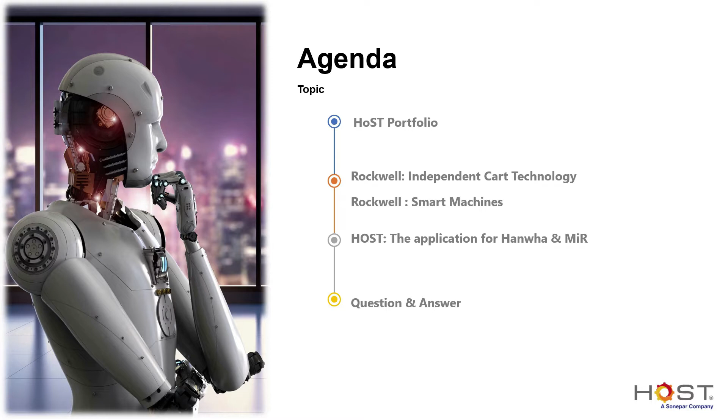Now, before we begin, please allow me to introduce Host and our suite of solutions. 3 decades of experience in industrial automation has made Host, part of Sonepar Group, the trusted and leading partner of companies looking for holistic solutions to their industrial needs.

Businesses like yours no longer need to rely on expensive and cumbersome manual processes. With our cutting-edge solutions on carbon footprint reduction, energy management, production and operation, smart manufacturing, robotics, network, cybersecurity, we deliver customer-centric value to address evolving business needs. Get work done quickly. Contact us today.

Established since 1979, Host have transformed into a solution provider, focusing on innovative and sustainable automation solutions to the market. In 2014, we joined Sonepar Group.

Sonepar has been the industrial automation and electrical product distributors for over 50 years, with 48,000 associates worldwide and 145 operating companies in 48 countries. In 2019, our group sales achieved a total of 24 billion euros.

With the ever-evolving needs from the manufacturing environment, new rules and trends lead to smart and flexible manufacturing. With consumer demands like myself and you, more information on nutritious value, health, ethnic, allergy warning has been clearly labeled on the packaging. Therefore, it leads to customization and in turn creates multivariant packaging of the same product, which creates more packaging SKU. And manufacturers are struggling to keep up with the changes as the number of increased SKU is projected at 10 to 50%.

With the shrinking labor workforce for manufacturing, time to fill out a trained and skilled technician takes roughly about 70 to 120 days. With this general trend, let's see what challenges exist in the manufacturing environment.

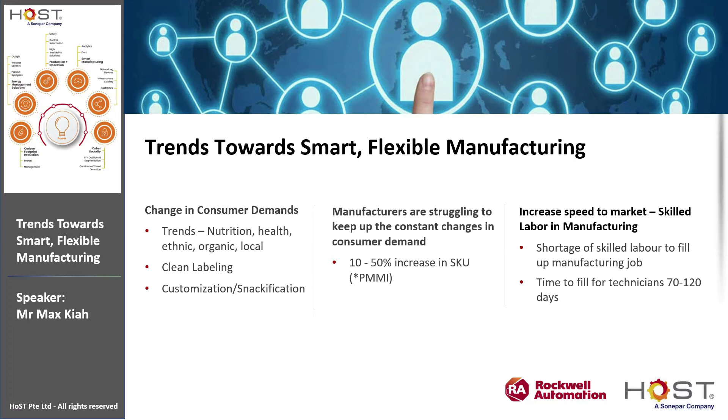Now let's look at the trends, challenges and concerns from the end user viewpoint. Under operation, we have high product mix causing numerous setup changes, causing lost production time, high maintenance costs on belt and chain systems when running at full speed as the maintenance intervals get shorter, inventory pressure as you need to keep numerous mechanical parts to keep the belt and chain system running, high energy costs, and plant floor space constraints.

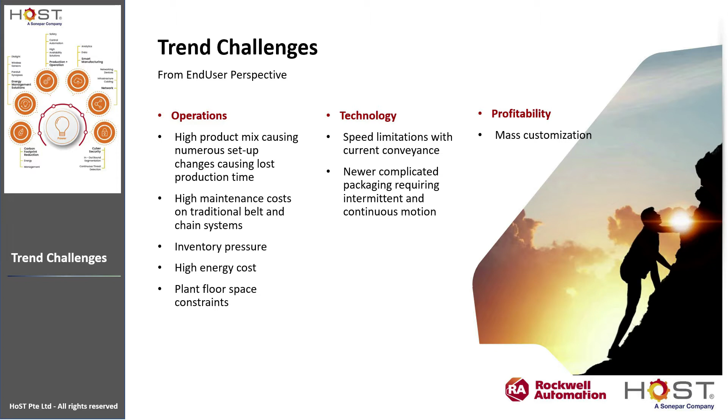We look at the technology segment: speed limitation with the current conveying system, and newer complicated packaging requiring different motion profiles or assembly techniques to achieve the final packaging. Last but not least, we look at the profitability of the plant. With mass customization, it means dipping into your bottom line. Machine design and manufacturing flexibility.

Let's look at higher production rate, simpler mechanics and pitchless control. Machines that have to run multiple sizes such as 4, 12 and 16-inch carton must be sized for the largest carton, making smaller carton run less efficient.

ICT gives freedom of pitch, allowing for optimized design to maximize speed regardless of size. We eliminate chain, belt, gearbox and other mechanics that can limit speed.

Faster changeover. With the number of changeovers continuing to increase, fast and consistent changeover can have an even greater effect on overall production that a machine can achieve.

Reduction in in-feed complexity. Traditional machines require product to be oriented, spaced, and timed precisely to function properly. This drives in-feed complexity. ICT provides flexibility that allows for simpler in-feed, with spacing and timing inherently handled by the ICT technology.

The individual tools on the mover can stay the same for various SKUs. Any changes for pitch or spacing are done electronically and require no physical change.

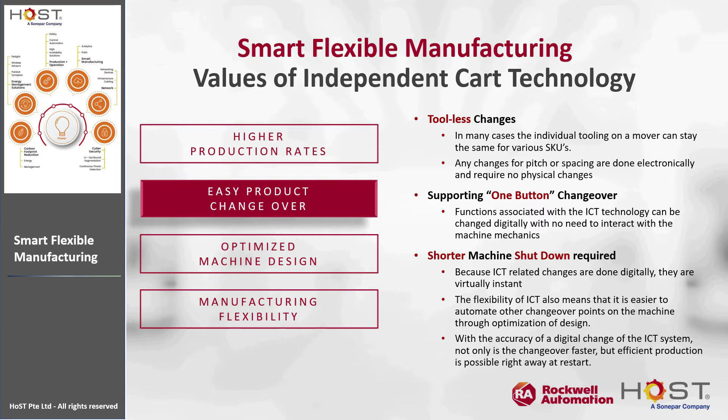Product is precisely spaced coming into the machine, no smart belt or complicated transfer needed. This improves operational efficiency and reliability, with a mix of continuous and intermittent motion. The process carried out within the machine can be optimized, utilizing whatever motion is most efficient for the production sequence. Reduce floor space and manpower.

Functions performed by multiple machines can now be integrated into a single platform, which makes integration of the turnkey solution easier.

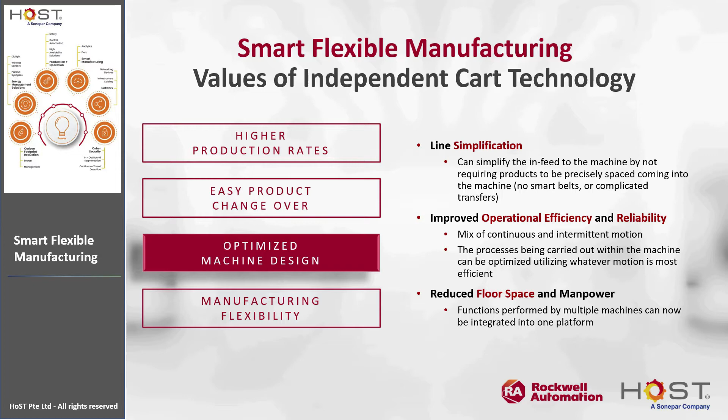Manufacturing flexibility. Format change on the fly can optimize performance based on the package being run. Simple tooling change and programming can allow for reconfiguration to a new packaging or function. High scalability allows easy redeployment for new products because it's not limited to what the machine was originally designed for. This enables possible capital savings by reusing or redeploying the equipment across a broader array of applications.

We also have a modular machine approach, which with the use of robots and their flexibility, makes it easier to design the rest of the function of the machine to be modular and changeable. The end user can utilize much of the existing asset versus a whole new capital investment.

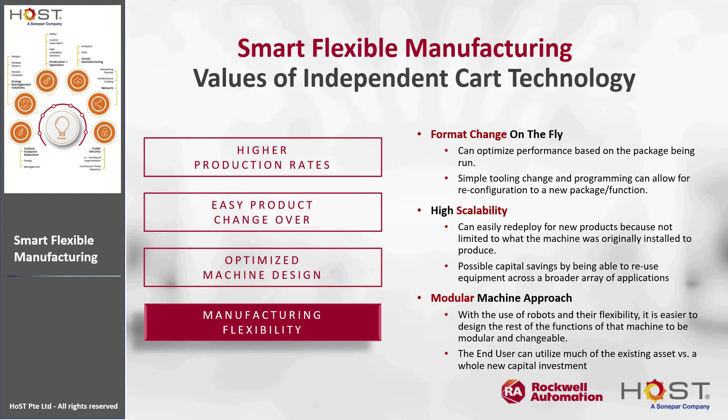Historically, motion control has incorporated chain, belt, gear, and other mechanics, and this indirect solution has limited flexibility, wasted energy, and excessive maintenance costs. So with ICT, we can achieve higher throughput with fewer mechanical components and linkage.

We can achieve a higher acceleration of 10G and also a speed of up to 5 meters per second, combined with fully controlled motion profile for higher throughput.

Unlimited flexibility. Each moving cart is controlled independently, allowing for flexible mechanical pitch, enabling the same machine to handle multiple package format sizes at once while fully controlling product motion.

Constant package tracking. Integrated track and trace software controls the cart with precise knowledge of the cart's position, eliminating the need for external sensing and complex tracking solutions.

Increased uptime. Elimination of mechanical linkage and components allows a minimum number of moving parts, reducing overall downtime, maintenance, and energy consumption. Smaller footprint: technology allows combining all product formats in one machine type within a smaller footprint.

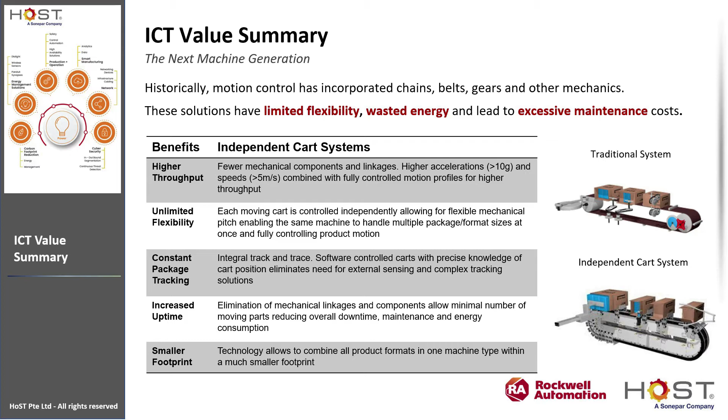Let's look at the independent cart technology portfolio. We have the MagneMover LITE, which is an intelligent conveying system for payloads lighter than 10 kg. It's easy to design and set up, flexible, modular, and scalable, with simple programming, and can control up to 1,000 carts within a large system.

Next we have the QuickStick and QuickStick HT. They are intelligent propulsion and control systems that can have payloads from 10 to thousands of kg. It's flexible, modular and scalable, and like the MagneMover LITE, it can have up to thousands of vehicles in a large system.

So for iTRAK, it's an intelligent positioning system. It's a closed-loop performance LMS, and you can synchronize with other motion axes within the production area. It has high dynamic performance and force.

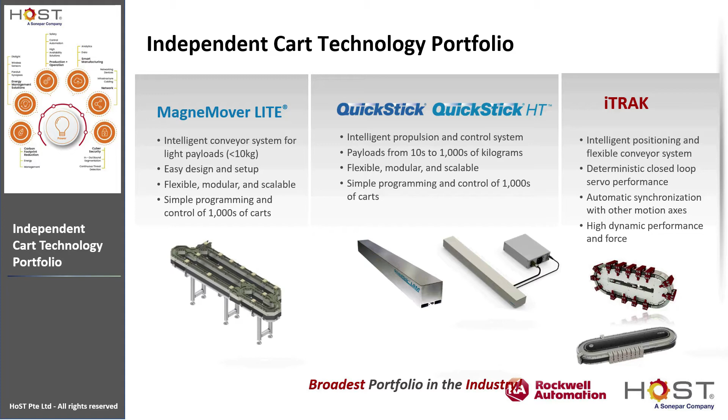MagneMotion is more favorable with system integrators and end users, with many wins for between-machine transportation and station-to-station transportation for assembly operations. It's able to do multi-lane layouts, and switching is a major differentiator.

Sync motion is gaining popularity for synchronization with external auxiliary equipment outside the system. For iTRAK, it's favored by OEMs.

Machine builders see many wins for high payload and high speed applications, building the core of the machine and requiring completely new machine design. It takes a C-level approach, mechanical and electrical engineering, and is mainly used in packaging, manufacturing, and assembly applications.

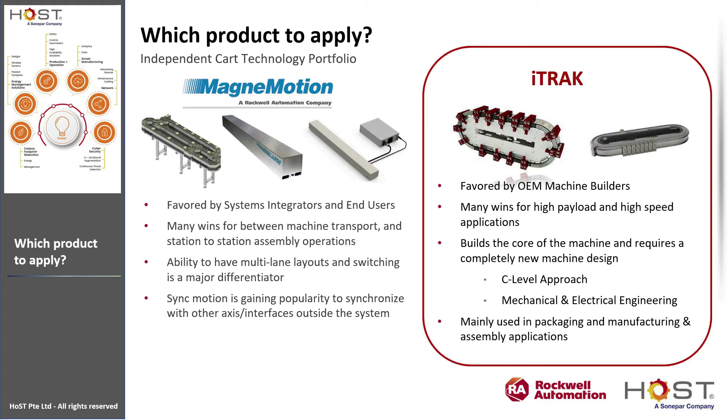All of this product is scalable, modular and flexible. Importantly, these are controlled with what we call fire-and-forget control programming.

You can do a merge, diverge, transversal with complex path systems on a large scale transport design, mainly controlled via AB PLC over Ethernet IP and control over TCP IP, using the same common software platform for the MagneMotion product family.

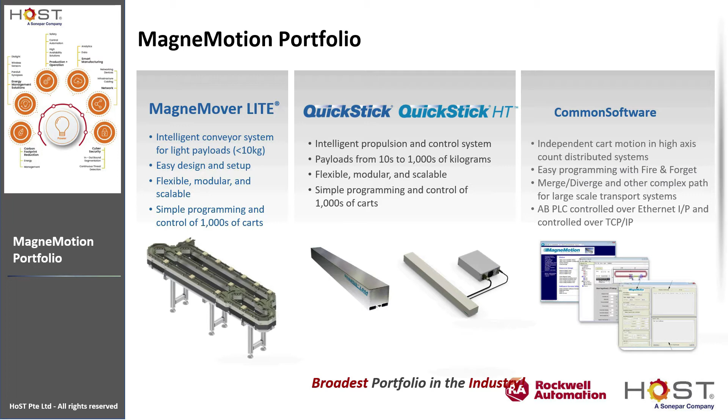We have the iTRAK Medium Frame where you can have a peak force of up to 793 Newton, perfectly fit for higher payload application. We also have what we call the iTRAK ETO, where you can have liquid cooled motor modules, heavier payload movers, and large radius curve.

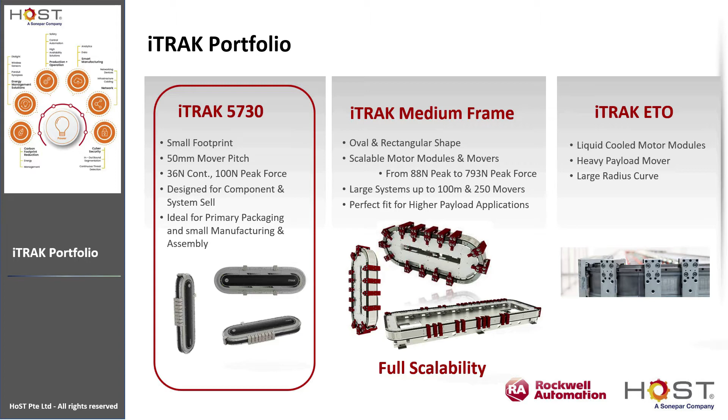Control style. The standard control for MagneMotion is like a taxi service, or what we call fire and forget. We just issue a command to a vehicle to move to any point in the MagneMotion system. The control system will drive the vehicle to the final destination at max velocity and acceleration, generating a motion profile and adjusting it as necessary for the vehicle to arrive at its destination. As mentioned, collision avoidance is a standard feature within the fire and forget control.

We have another type of control, what we call the SYNC IT Control. It's as good as driving a car. That means it complements the control of motion of the vehicle, whether QuickStick, MagneMotion, or iTRAK. You can determine the acceleration, the speed, where it moves, and where the sync zone is - that means where you need to synchronize with external auxiliary equipment. So this is the two types of control available for the ICT family.

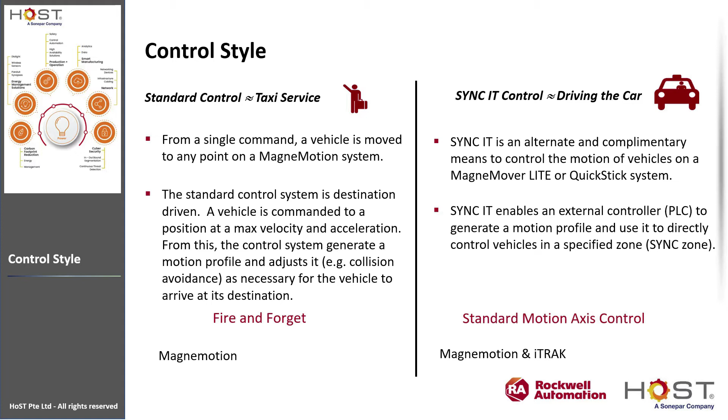Now let's view an application video of horizontal form fill and seal, whereby it utilizes easy changeover using a one-touch button, so everything is changed automatically and very fast.

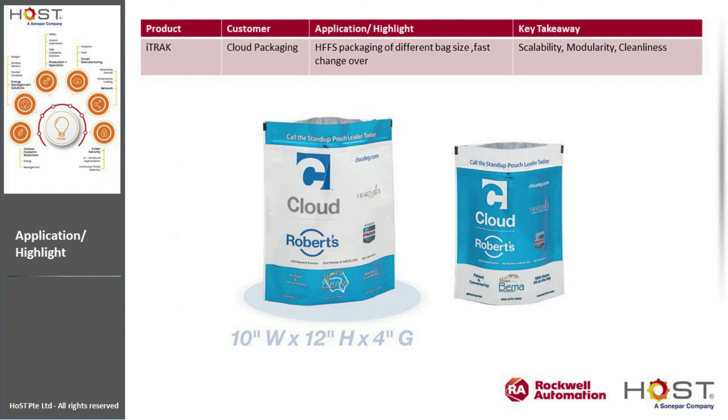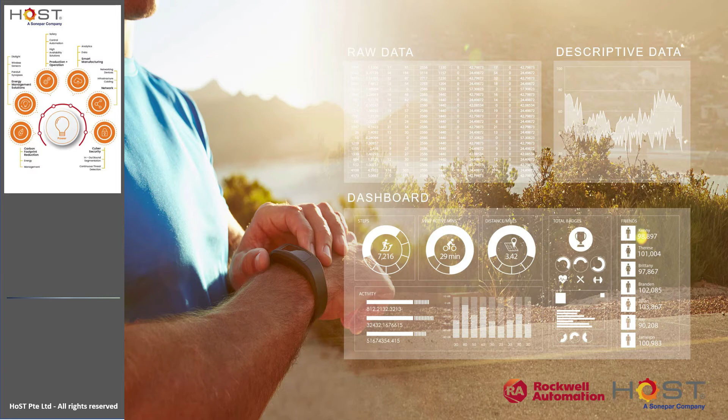So how does this apply to industrial automation? There's an evolution underway of converting components into intelligent connected devices. These devices are being integrated into broader systems that are radically changing the competitive landscape for everyone. It is also creating new workflow tools to allow workers to be more collaborative, agile, and efficient.

Digitalization is about bringing the machine closer to people with things like augmented reality, where we can use mobile devices like our phones or glasses that provide contextual and actionable information in real time - technology that can be used to train operators or augment field technicians as they diagnose, troubleshoot, and repair products in the field.

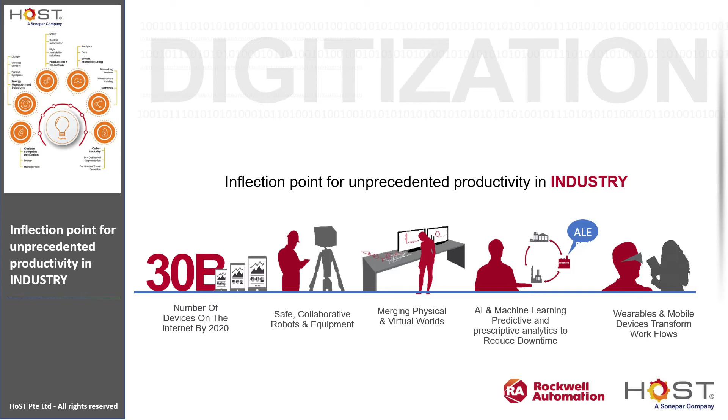Based on some statistics, it is predicted that by 2025, IoT will contribute a cumulative increase to the world economy of between $5 to $11 trillion.

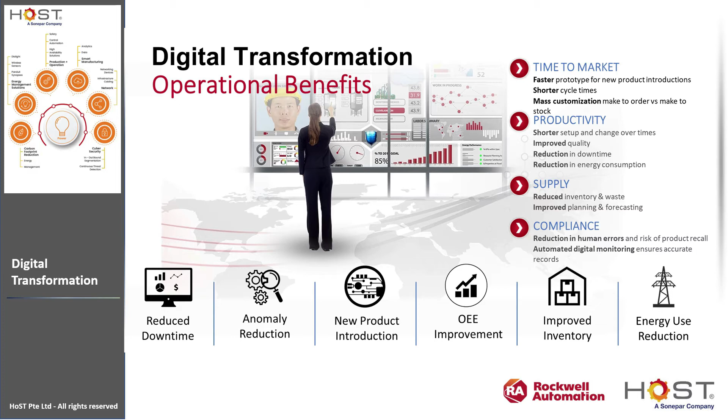So what is a smart machine? It's about turning data into action in real time. This intangible commodity is the key to better understanding of operational performance at the most granular level, so they can improve operations and produce more at higher quality levels in a more efficient manner.

A smart machine also solves challenges created by pressures and trends faced by end users today, such as providing unprecedented access to real-time data that can be turned into actionable information. Data can be logged and analyzed to help workers make better decisions and ultimately optimize not only the equipment, but the manufacturing process itself. These capabilities are creating new opportunities for organizations to achieve faster and more productive processes, produce higher quality products at lower cost, increase productivity, and more optimal supply chains.

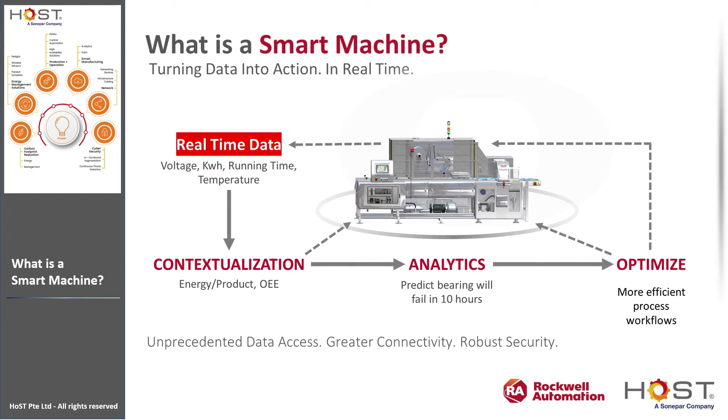So, building a smart machine requires the right mix of technology, process, and people. What are the key business drivers for OEMs to build a smart machine? Firstly, I would say it adds value, it also reduces costs, creates new revenue streams, and reduces risk.

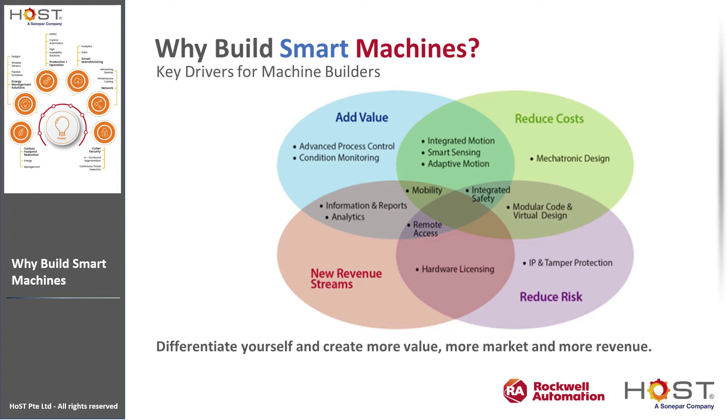Building a smart machine will bring positive impact to your business, so don't wait - start identifying opportunities. Building a smart machine is a journey, so start small while building up a roadmap to reach the ultimate goals.

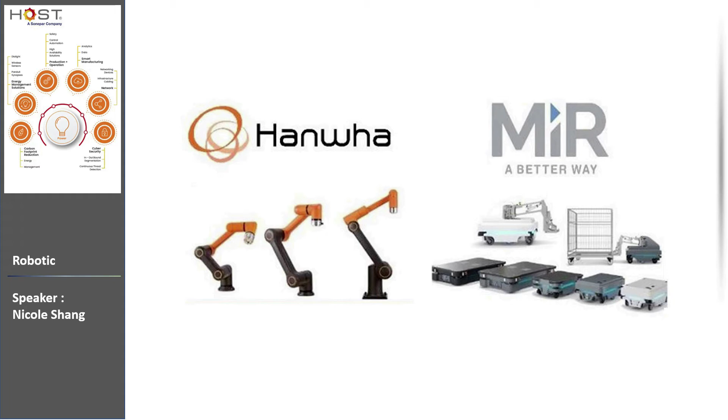Today we will be looking at the following: Hanwha Cobot and MiR, the mobile industrial robot. We will be running a live Q&A at the end of this webinar, so if you have any questions, just pop them in here. Let's start with the mobile industrial robot.

What is the difference between AMR and AGV? A guided vehicle follows fixed routes, usually along wires or magnetics embedded in the ground. An AGV robot is clever enough to use simple sensors to avoid hitting obstacles along the way, but it's not clever enough to go around them. Whereas AMR is much more sophisticated, packed with sensors and powerful onboard computers that help it understand its operation environment.

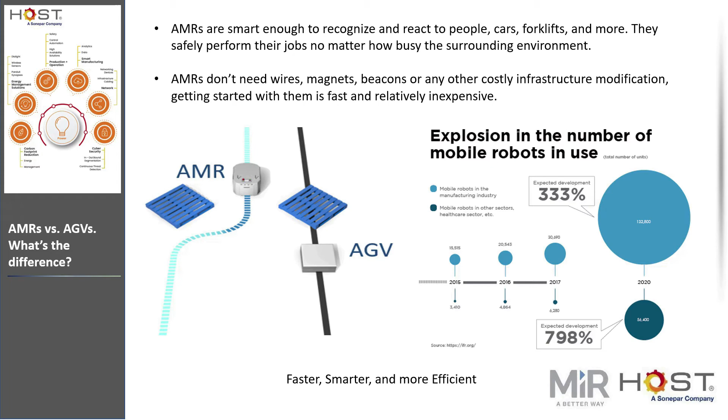There's been an explosion in the number of mobile robots in use in 2020, a growth of 333% in the manufacturing industry and 798% in the healthcare sector. This research result is done by the International Federation of Robotics.

Different industries have different needs, so every industry faces unique challenges, but across all types of sectors, AMR can add value to make your business work more efficiently, smarter, and safer than before.

MiR is an open robot ready for your application to be integrated. With the MiR Go, we present some of the applications that are ready to go, easy plug and play. Here you can see different categories and specific products and solutions made by third parties for customization of the MiR robot to meet customers' needs. You'll also be able to ask for documentation you need to make your application through MiR.

The MiR UI is an extremely user-friendly interface, works on PC, tablets, smartphone, and the dashboard is customizable.

The MiR Fleet also offers centralized control of the robot from a single station throughout your facilities. Thanks to the intuitive web-based interface, it's easy to program and control a robot fleet, including robots with different top modules, hooks, and other accessories.

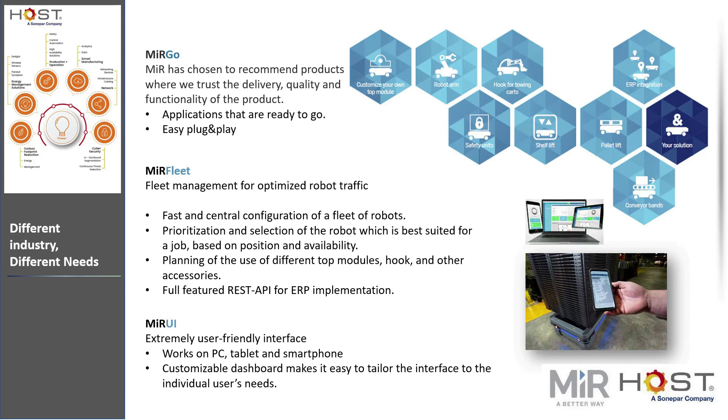Once the programming phase is over, the system manages, prioritizes, and selects the most suitable robots for the operation that needs to be carried out, based on positioning and availability. You'll also be able to receive email notifications keeping you updated about obstacles or other unforeseen events that may prevent the robot from carrying out a task.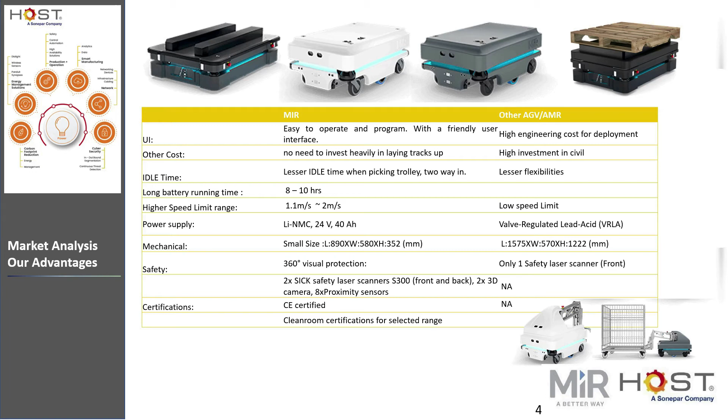So about the sensors, let me bring you to more details. Here are the sensors for safety. There are two types of sensors mainly used for navigation and obstacle avoidance.

The 3D camera shown in figure 1.1 is used for frontal obstacle avoidance, and the camera does not record live video but point clouds. It detects obstacles in front from 5 cm above the floor to 1.8 meters high.

Our laser scanners, each with 270-degree coverage, there are 2 in each corner of the robot, which covers a total of 360 degrees around the robot, 2-meter emergency zone, and 8-meter warning protective field range. The laser scanner is also used for mapping, planning routes, and localization.

Other than that, there are ultrasonic sensors, internal sensors including IMU, motor encoder, and accelerometers.

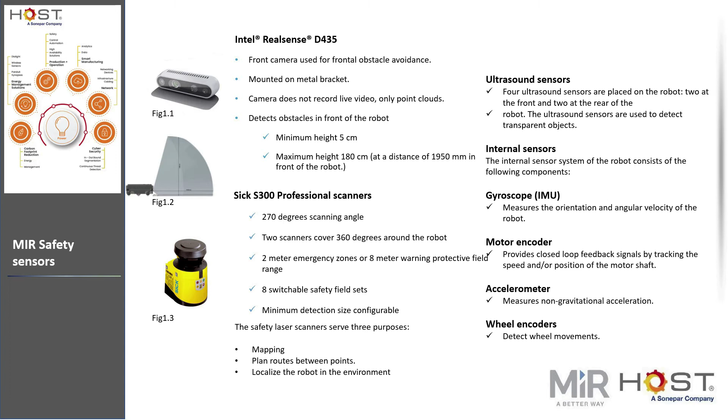This is what the robot will see in a real-life example. Figure 1.1 shows what the human eye sees, a chair in the corner of the room, and Figure 1.2 shows what the robot sees in front using the front camera, a cloud of dots projected above the map.

Figure 1.3 shows what the robot sees with the laser scanners, red dots fitting on top of the black lines of the map.

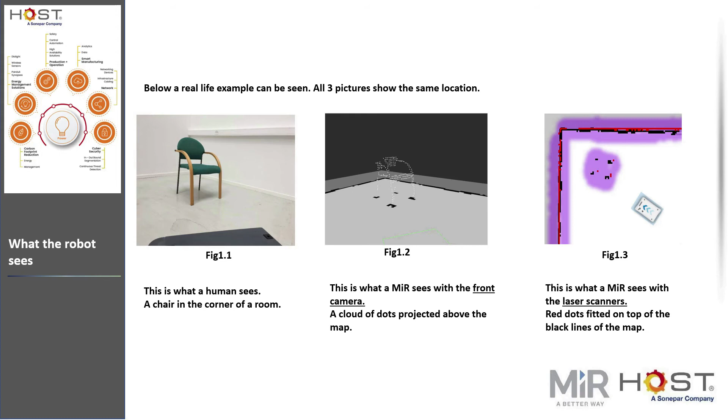Let me show you some case studies for MiR application. Infinitus specializes in R&D and manufacture of Chinese herbal supplements. A total of 3 MiR 200 robots were deployed in the oral liquid production workshop in the Jiangmen plant, allowing users to optimize human resource allocation and maintain a well-balanced workflow in terms of traffic and productivity.

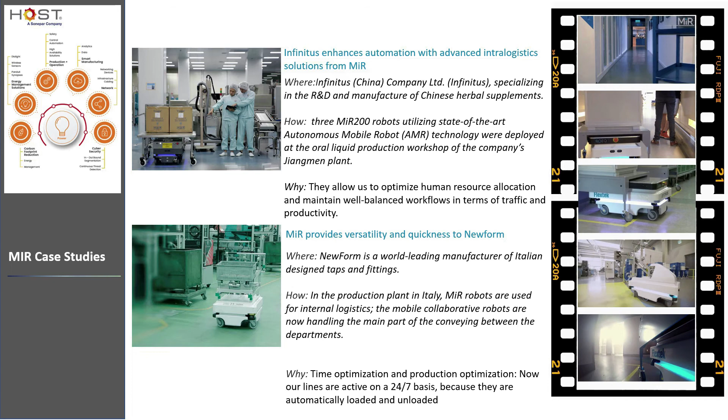And New Form, which is a world-leading manufacturer of Italian design taps and fittings. The MiR robots are used in internal logistics, and cobots are now handling the main parts of the conveying between departments. As a result of time and production optimization, lines are active on a 24/7 basis.

Let me show you a video before we move on to Hanwha cobots. Here you go.

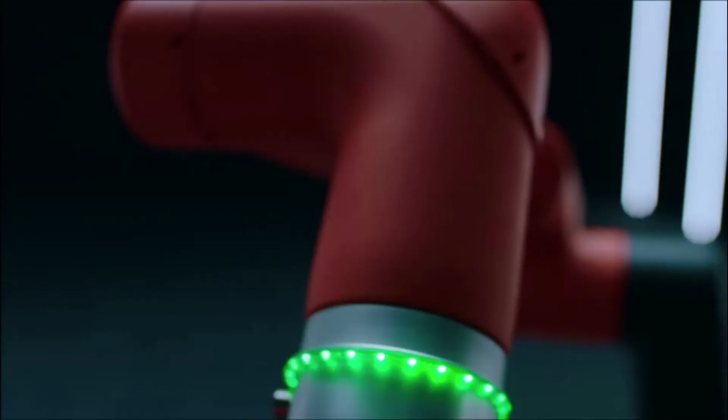What is a collaboration robot? Cobots are robots intended for direct human-robot interaction with a shared space, or where humans and robots are in close proximity. Automation is no longer difficult.

The collaboration robot, Hanwha, is easy to control and flexible in responding to changes in the production layout, efficiently cutting investment costs and operating expenses. It also provides a safe and convenient work environment.

There are a total of 3 types, classified as 3 kg, 5 kg, and 12 kg payload. The HCR3, with 3 kg payload and an infinite rotation on the end joint, has an advantage for screw driving and assembly applications.

The HCR5 has a range of 915 mm, helps employees improve productivity, and is also clean room class ISO 2 certified. For the HCR12, it has a larger working radius, making it easy to pick and place heavier loads.

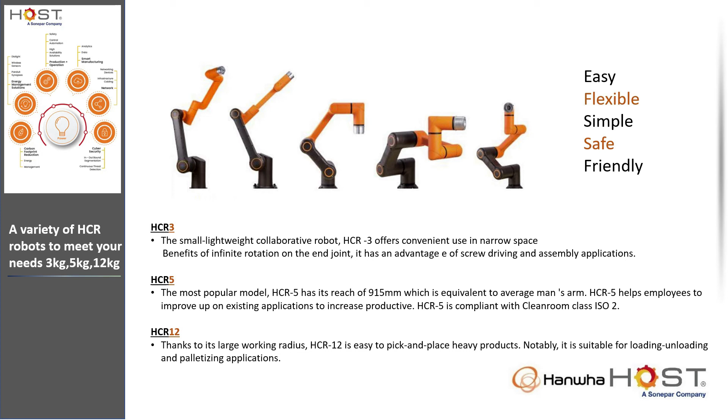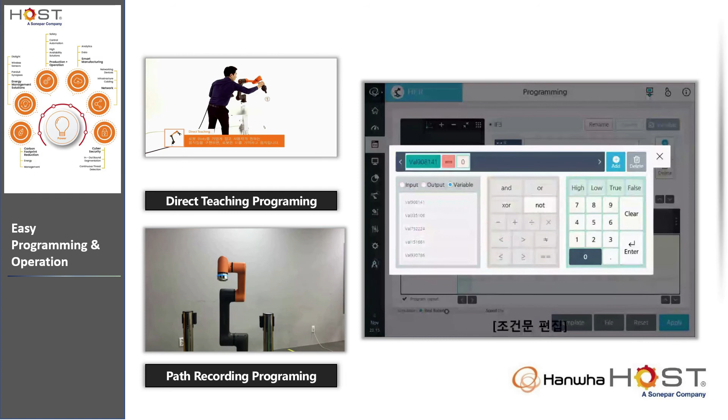Hanwha robot is easy to program and operate. It can be easily programmed using its icon-based graphic user interface, and the timeline-basis programming allows the user to intuitively monitor the workflow.

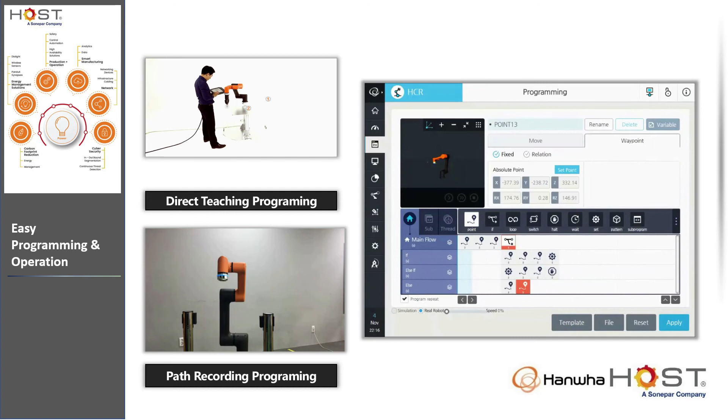In a simpler way, the user is able to grab the robot and direct teach the waypoint, or record the motion path to the robot. You may look at the video here.

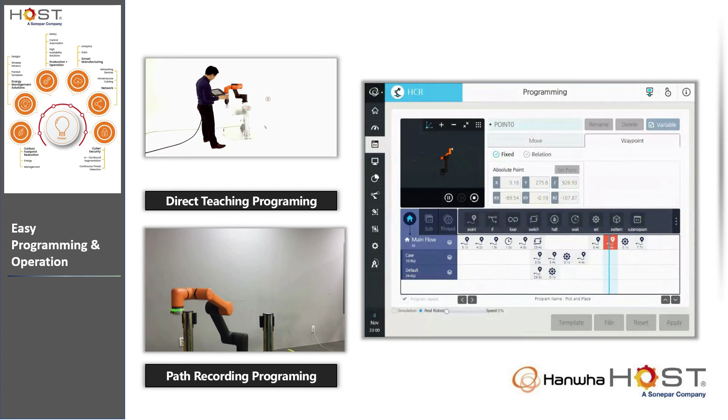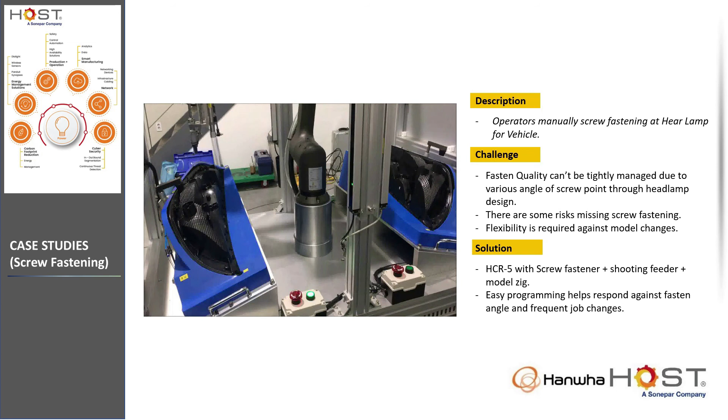This is another case study for arc welding. It uses an HCR5 with a welding gun and feeder, overcoming challenges in operator safety, high accuracy, and repeatability. The operator decides the start and end point by direct teaching.

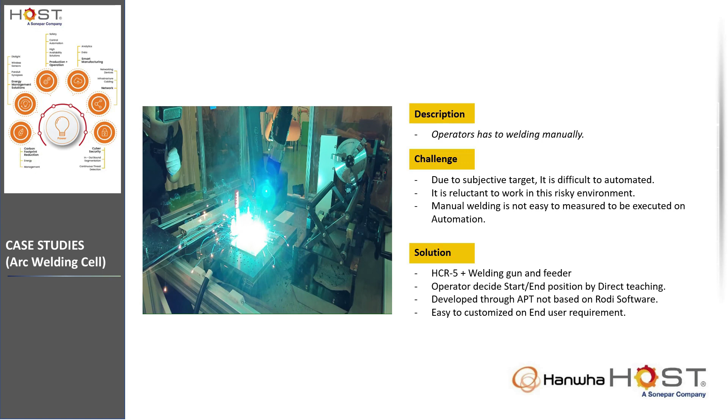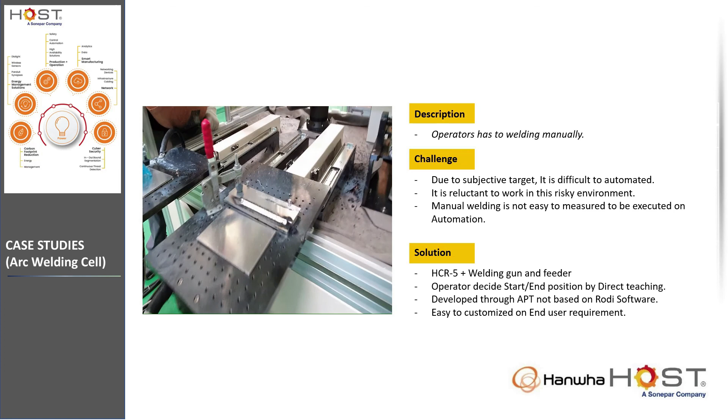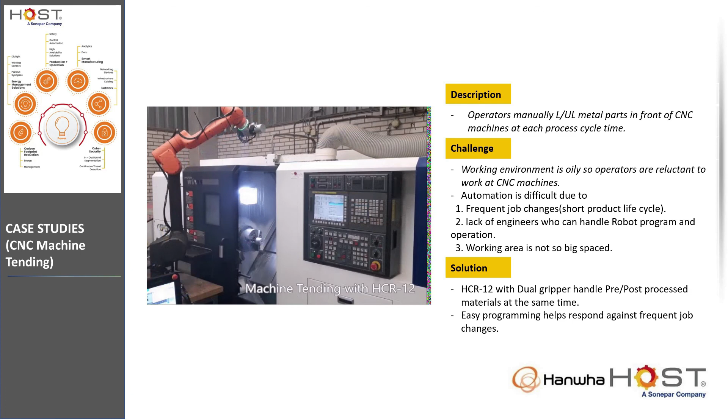The HCR12 with a dual gripper is used for CNC machine tending. This case study overcomes challenges in manpower shortage, short product life cycle, and tight working space.